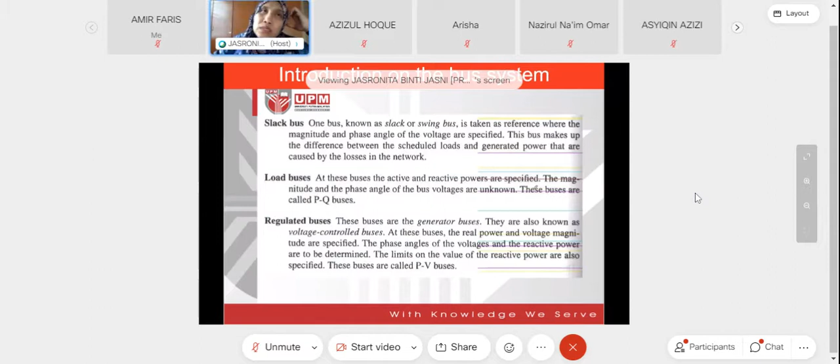So before this, we know that we have to deal with buses, right? Class, we deal with the buses, right? Yes. Okay, so in order to transmit, from the generator, from generation, it will go to one bus, and then to transmit to other bus in the system until it goes to the consumer. Understand?

Okay, so in the bus system itself, we have several types of bus. First we name it as a slack bus. You need to know this. First, we name it as a slack bus, or we call it a slack or swing bus, and then we take it as a reference bus. Slack bus is a reference bus.

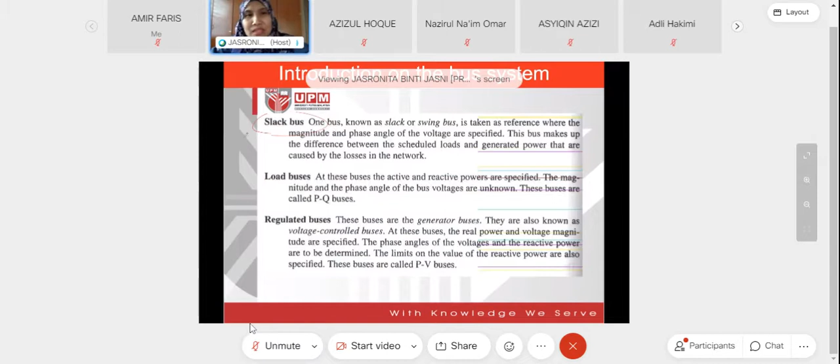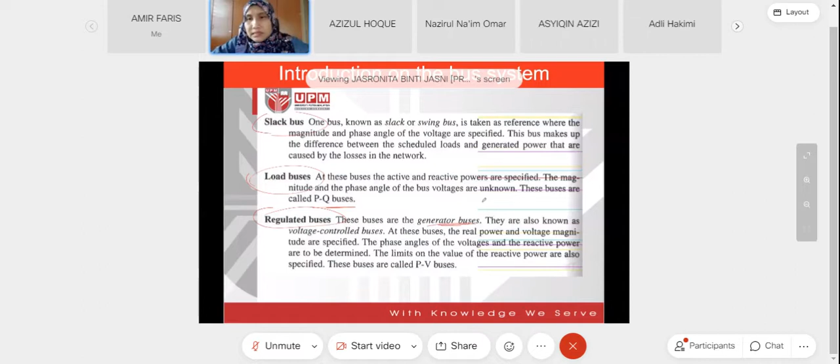So slack bus or the reference bus, and then the load buses, we call it PQ buses, and then the regulated buses, where you consider as the generator buses, or we call it the voltage control buses, and also we call it the PV buses. So we have slack bus, we have PQ bus, and we have PV bus, whereby the slack bus is the reference bus, load buses are PQ buses, and regulated buses we call PV buses.

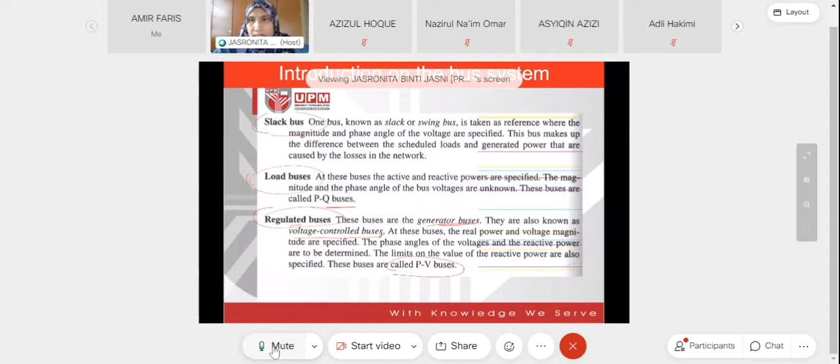Any questions here? Any questions? Okay. Remember this. Okay, and then, what is this? What is this, class?

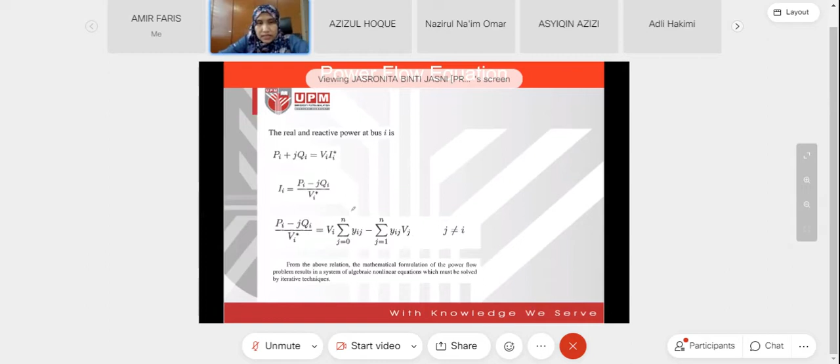So this is the real and reactive power at bus i. So Pi plus jQi equals to Vi Ii conjugate. This is at bus i, and then we can get the I. Okay, then we get the P, Q and V with this total of current, right? Current from the previous slide. Understand?

Can you see that from here? From this line, we get this equation. Understand? And then from P plus jQ, we got this one, and this equals to this one.

Okay, so it's stated here that from the above relation, the mathematical formulation of the power flow problem results in a system of algebraic nonlinear equations which must be solved by iterative technique. What is iterative technique, class?

What is iterative techniques? Basically, this is the iterative technique whereby you need to calculate one bus to one bus, one bus to one bus. Understand?

For this topic, I would like you to have Hadi Saadat's book. Do you have it with you? No, Doctor. Okay, I'll share it through Putra Plus later on. Please remind me. Because from the book, you can see how to solve this using MATLAB.

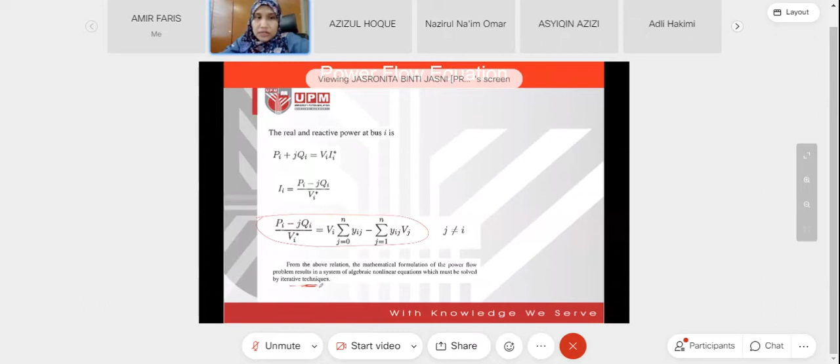But in order to do the iterative technique, there are several iterative techniques you can use. First, researchers came up with the Gauss-Seidel method. This is the first iterative method, called the Gauss-Seidel method.

Any question here? Can I share the book now? I have the book. Oh, you have the book with you. Okay, share it in the WhatsApp group.

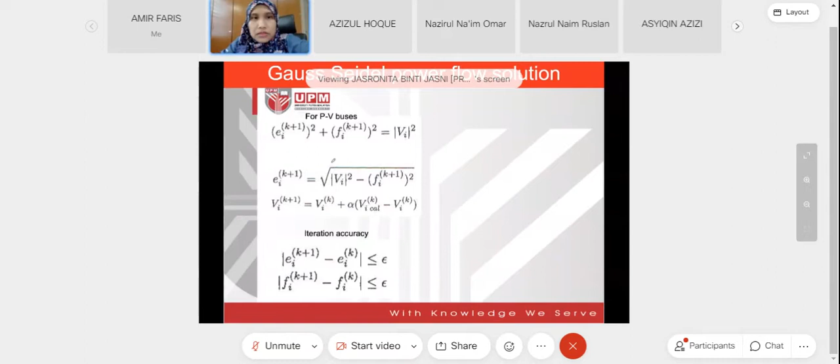So this is for the buses. What I want you to do now is let us try one example together. Is it possible, class? Boleh tak? Yes, Doctor. Okay, you start first.

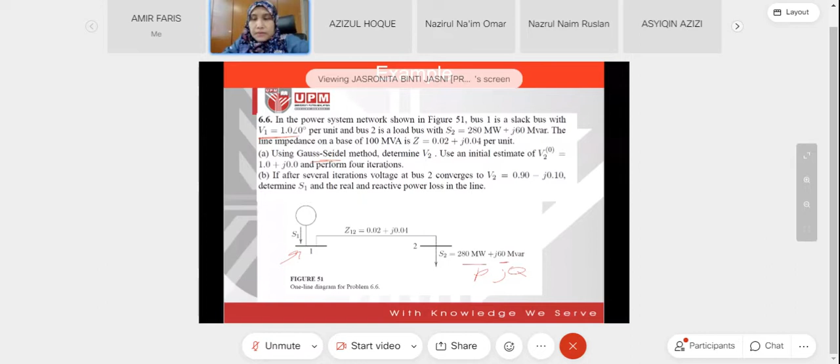Anybody would like to show me? Write it down and snap a photo.

What is the first step? Before you go into details, when you get this diagram, what is the first step, class? Anybody with me? Yes, sir. Okay, what is the first step?

Tak tahu? You say this is... Oh, is this change to admittance? Change it to admittance, change it to Y.

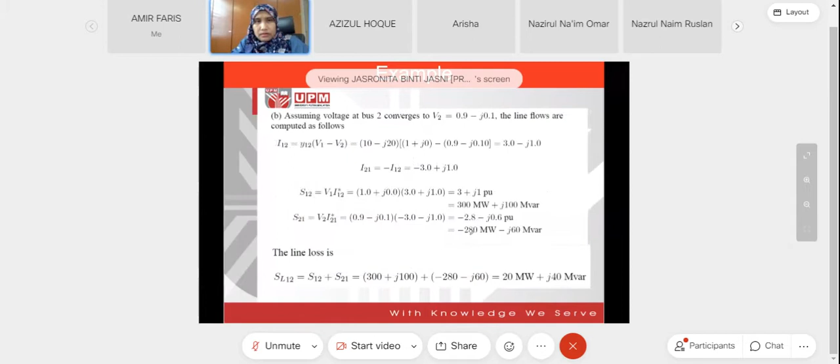Mari tengok lagi lah. Anybody would like to show me your solution? Just snap it. Start from the general equation, and you can see.

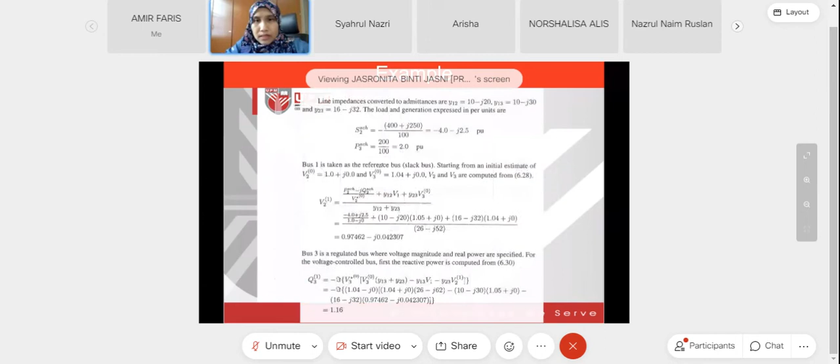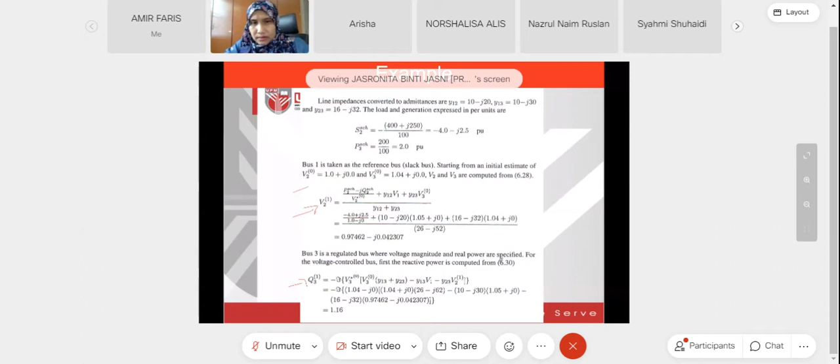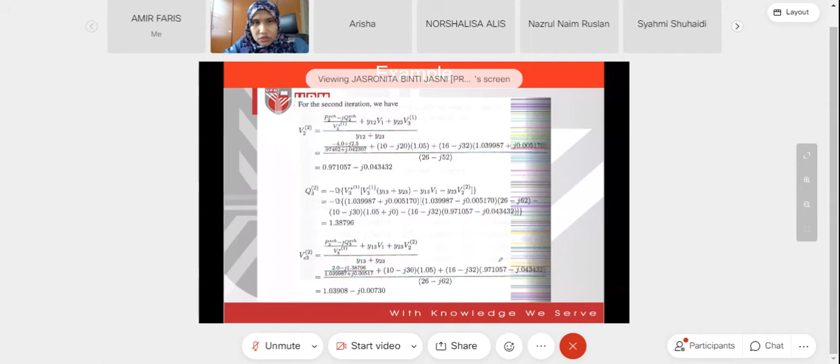Okay. Any other question? Nak try dulu ke macam mana? Would you like to try first or what? Okay, at the end, this should be your answer. This should be your answer.

What does this mean? What does it mean? Supply. Supply. Supply. Flow in. Flow in through. What is this? Real power. Yes, this is the P and then this is the Q. So this one is P, this one is Q, right?

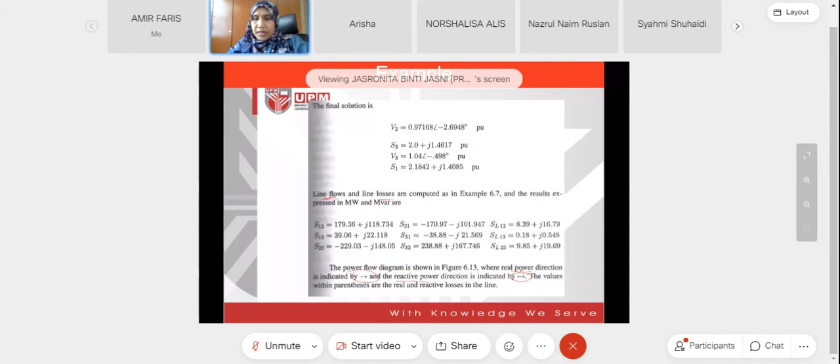Cuba cek balik. Cuba tengok sini. The S is P, kan? Cuba tengok. Okay, say that real power is given by this one. Reactive power is given by this. Okay, ini P and Q lah kan? So this is the P and Q. This is the Y, kan? So this will be what you need to come out with later on, by solving those equations.

Boleh? In the normal class, we solve this together. Okay? Boleh class? Before we proceed to the next method. Boleh doktor. Okay. Sure, eh?

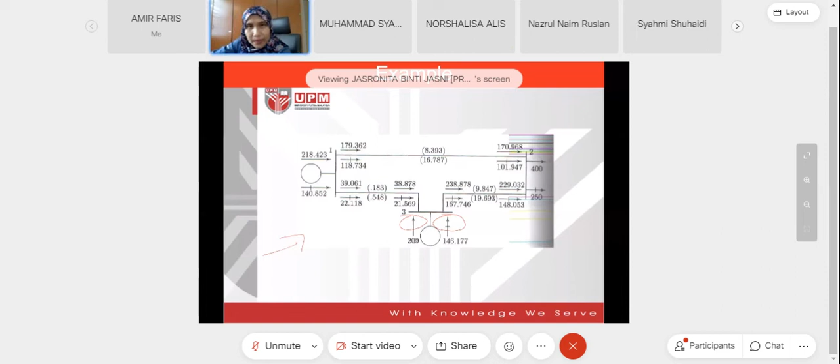So from that side, it's quite complex if we deal with too many buses. Okay, that's why another researcher came up with another solution, which they call the Newton-Raphson power flow solution. It's actually an improvement on the Gauss-Seidel method. So Newton-Raphson, this is the general equation for the Newton-Raphson. It is a normal equation, right? This one B. This one also you have already seen. This one also. From Hadi Saadat's book, you can see the evolution from Gauss-Seidel, Newton-Raphson, and so forth.

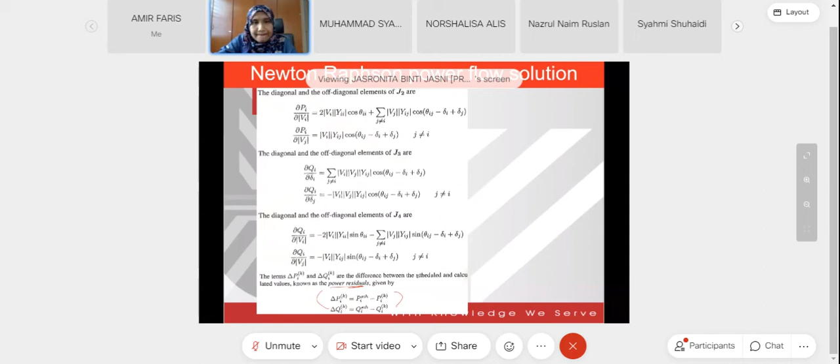So the Newton-Raphson, we deal with the matrix system, okay? We know the difference of P and the difference of Q, and we name them J1, J2, J3, and J4. This means the Jacobian. This is the Jacobian matrix. Convert it into the Jacobian matrix. And then we got this equation. This is the Newton-Raphson equation. The diagonal and off diagonal. Okay, so this is how we solve this. And by the end of the day, we would like to have this: the power residuals. Okay. This is the procedure for the Newton-Raphson load flow equation. You need to know this.

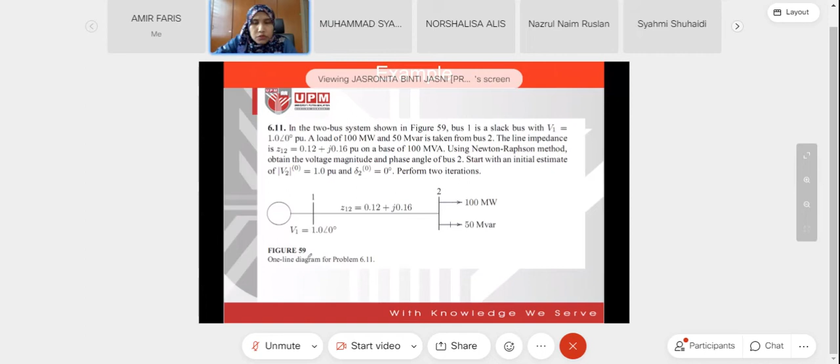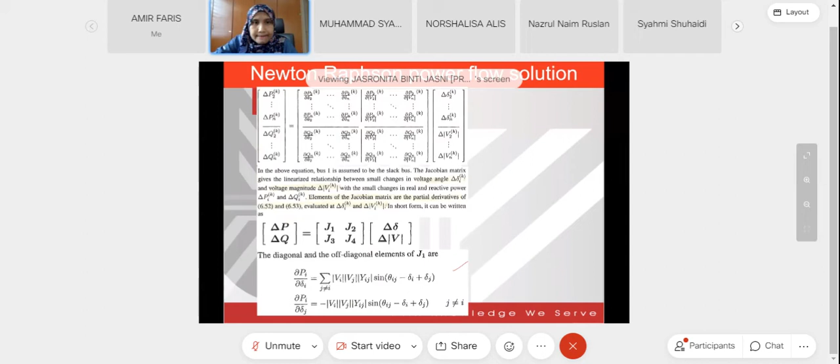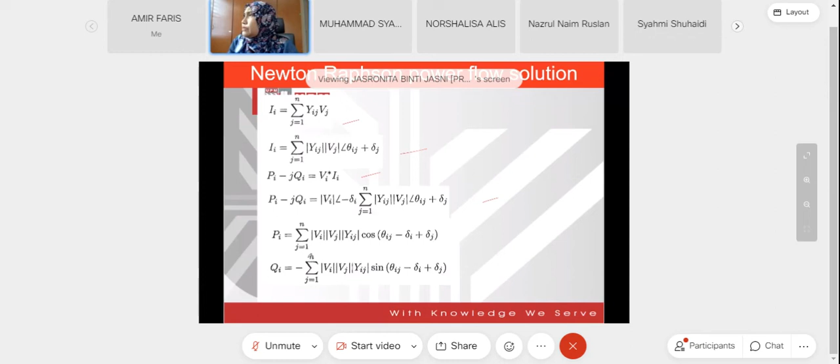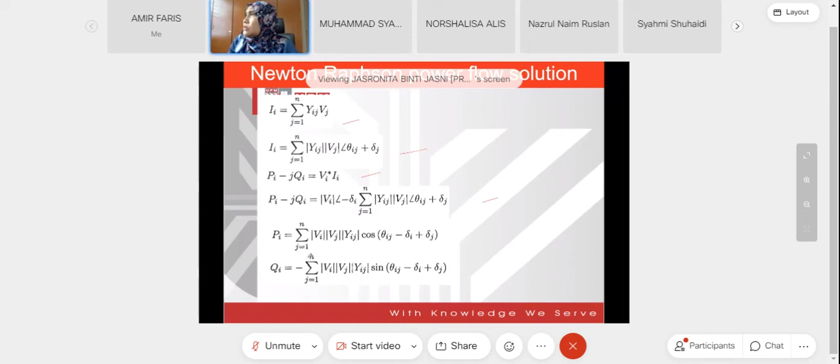What would you say if we try to solve the Gauss-Seidel method first? Is it okay? Yes, doctor. I agree. Okay, you try to solve the Gauss-Seidel method first. Let us see. You go to the problem. You have the books with you? Go straight to the problem. Or maybe you can solve the example first. Example, I already solved it for you. Okay, example done. Just now, which example did we do? Okay, class. Try to solve example 6.7 first. Try to solve 6.7.

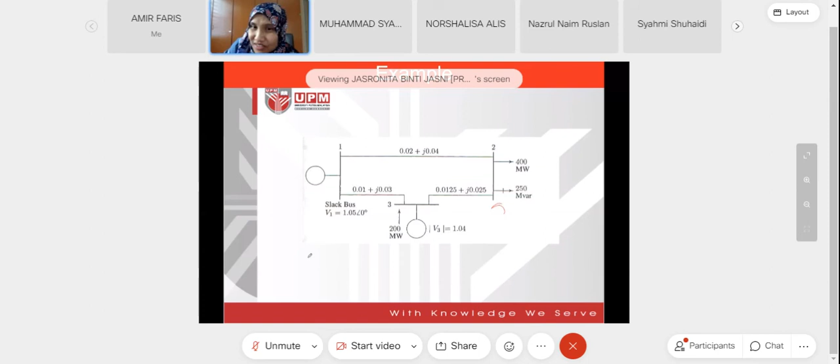Because Monday we'd like to proceed straight to the Newton-Raphson method. But in order to understand the Newton-Raphson method, you need to understand the Gauss-Seidel method first. Understand? That's why I want you to master it first before we proceed beyond the Gauss-Seidel method.

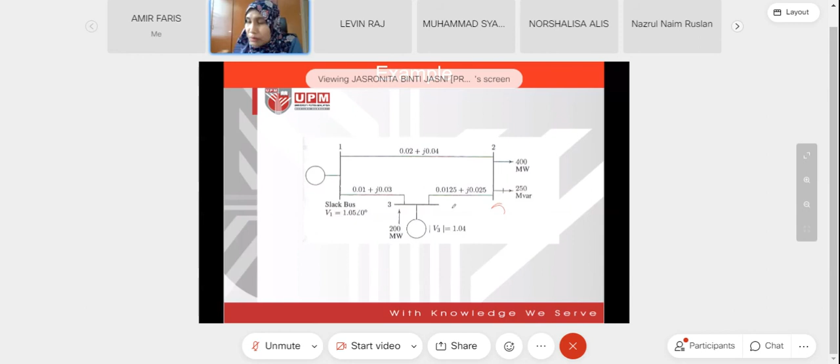So any question, class? Hello? Everyone's gone quiet. None so far. Okay. Can you show me for this question? Anybody has done it? For this question. Let me see. Who has done it? Nobody has done it? That's sad.

Levin, Raj. Doctor, yes. Have you done this? I haven't, Doctor. Have you tried this? I haven't, Doctor. Sorry. After this I will try. I have to understand everything properly, Doctor, then I will try.

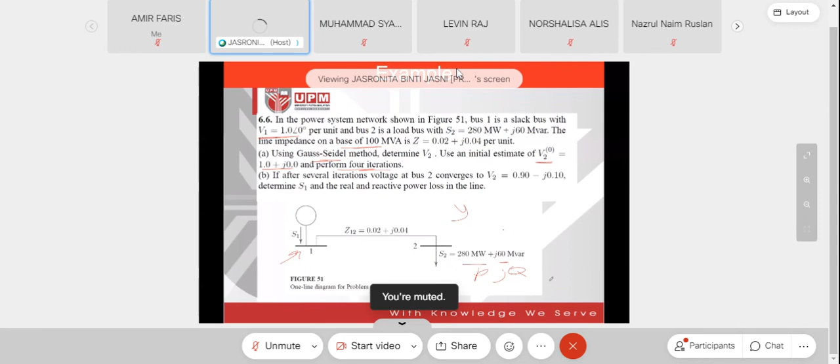Class, there is a reason why I upload these notes earlier. What is the main reason? Because it's hard for me to teach. That's why I want you to read first, try it first, then we can discuss. Understand or not? Yes. Because it's related with heavy calculation for this subject. That's why you need to understand it before you come into the class, or else I'll be talking to myself.

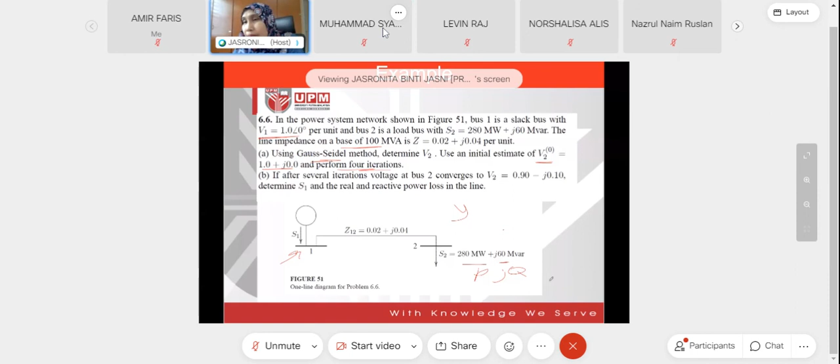Sorry, doctor. None of you tried this? I did ask you to do it just a minute ago, right? Anybody try? Doctor, I tried the first iteration only. Just show us. How do I show it, using WhatsApp? You can use WhatsApp and then explain. Okay. Show it on WhatsApp.

Why don't you start with the general equation so that you can understand? I want all of you to start with the general equation first. Like V, you cannot simply just put V2 blah blah blah. You need to start with the general equation. In the test, maybe you can just go straight away, but in the exercise, please start with the general equation. Basically, if you start with the general equation, you won't get it wrong. Understand?